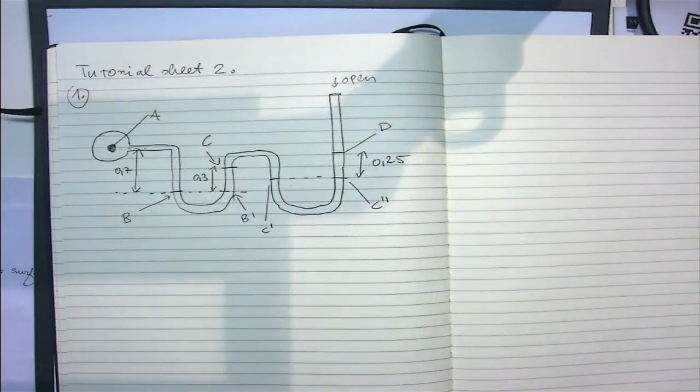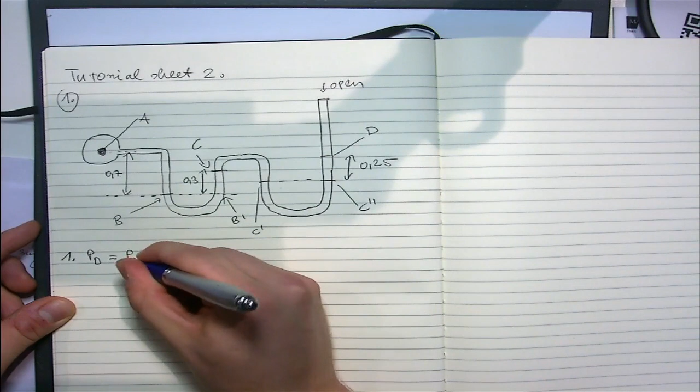And what we're going to do is start from point D and work our way back to point A. These questions look quite intimidating at first, but once you start to break it down, it will become a lot easier. The reason why we're starting at point D is because we know that this system is open. So at point D, the pressure is going to be atmospheric because this is an open tube. So the number one thing is pressure at point D equals the pressure of the atmosphere, ATM.

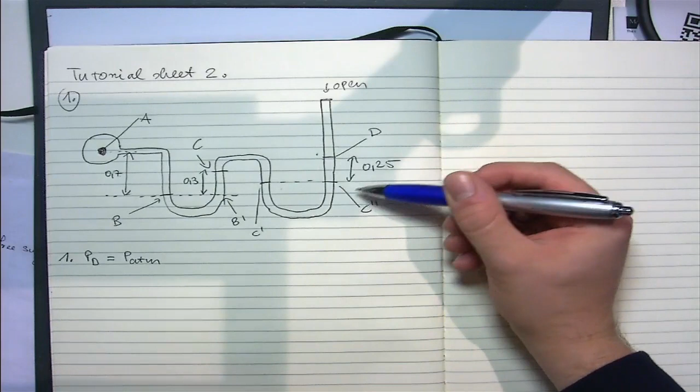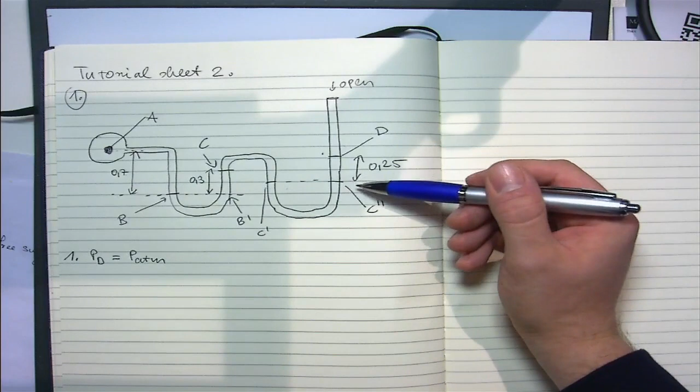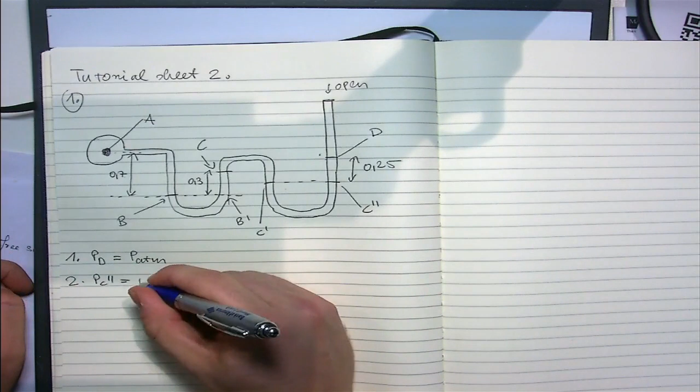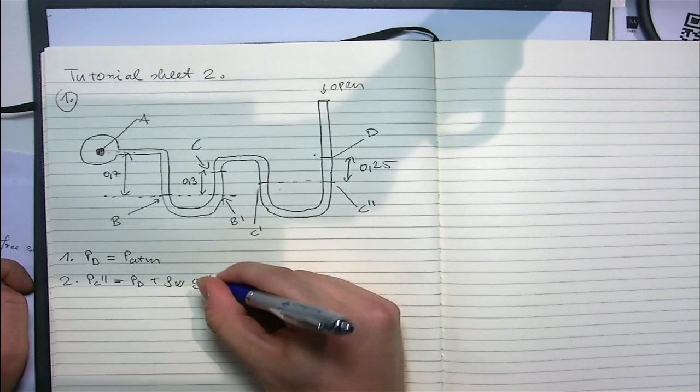So this is, so far, pretty clear. We're here right now. Then we move down to C2 dash, and what we see here is that there is water here, and we know that the equation for static pressure is rho times g times h. Then we know that PC2 dash equals PD plus rho water times g times 0.25, because that's the height of the water there.

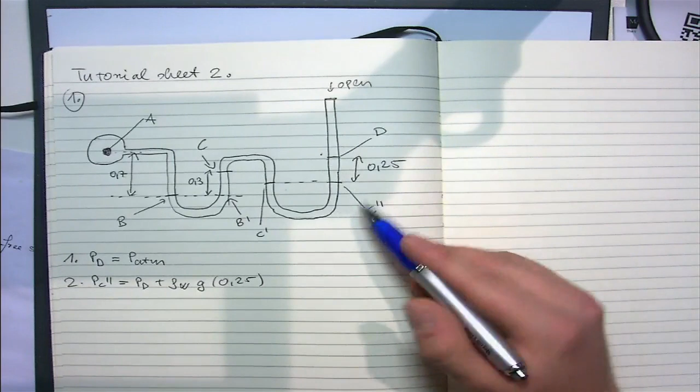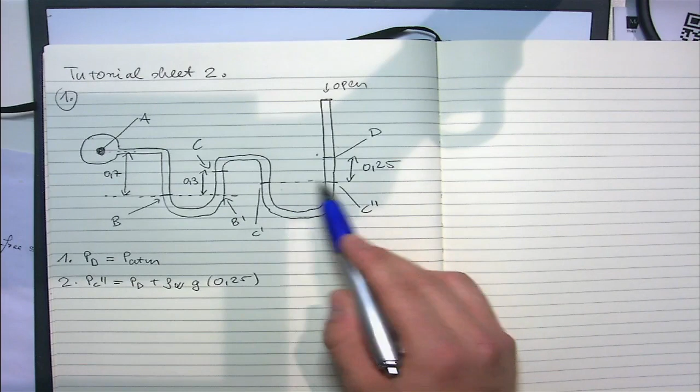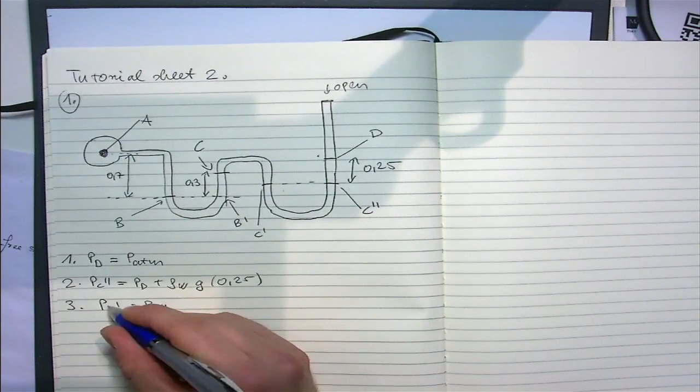So we know the pressure here. Because these are at the same level and they are connected, they will have the same pressure. So PC dash will be equal to PC double dash, because they're connected and they're at the same level. This is fairly intuitive.

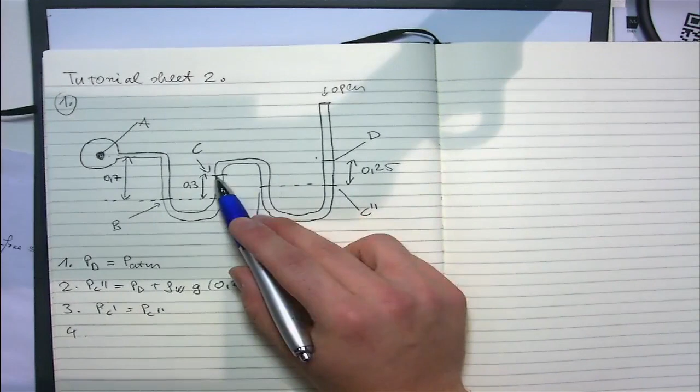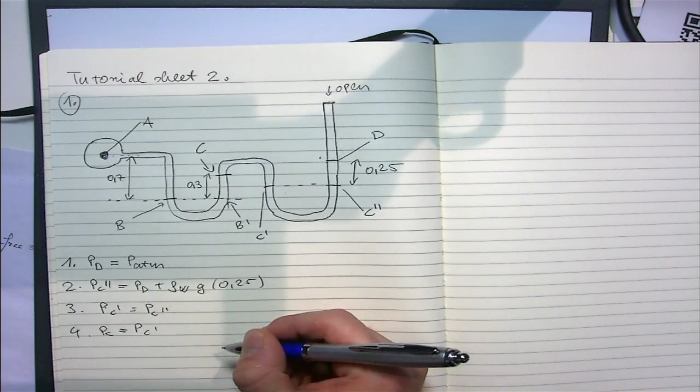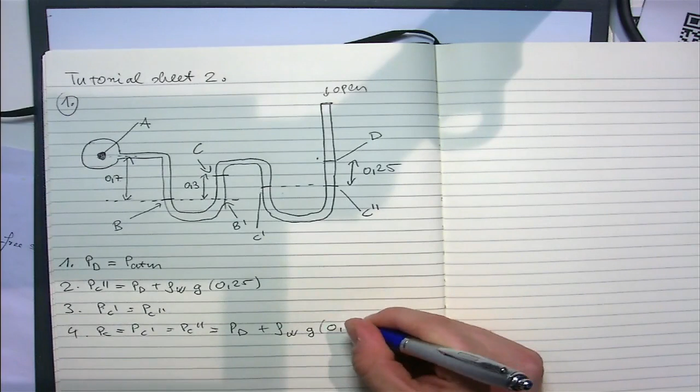And then we move on to C. If you look at the actual drawing, you see that the fluid filling the C section is actually air, and air has a relatively insignificant density compared to mercury and water. So in this case, we are just going to ignore this difference. So PC equals PC dash, which equals PC double dash, which equals PD plus rho water g 0.25. So we've already made it this far.

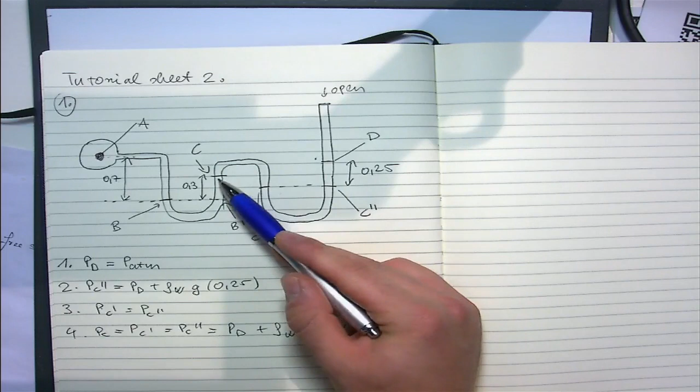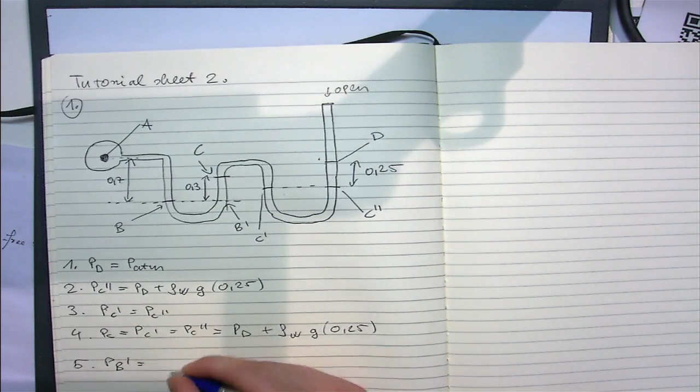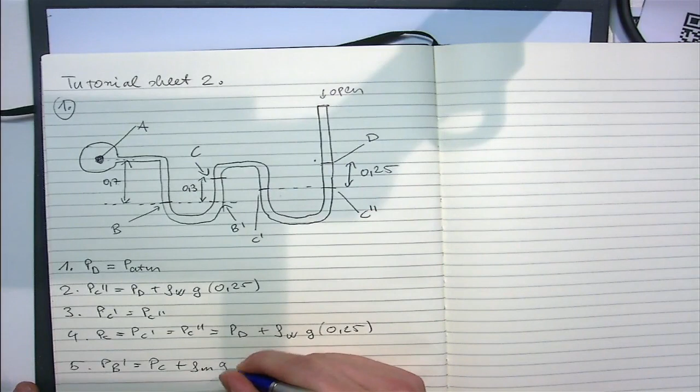Now the difference between C and B dash is 30 centimeters of mercury. So PB dash will equal PC plus this gauge pressure of 30 centimeters of mercury, which is going to be rho mercury times g times 0.3. Is this clear so far? Yeah? And then we move to PB, and since these are connected and at the same level, PB equals PB dash.

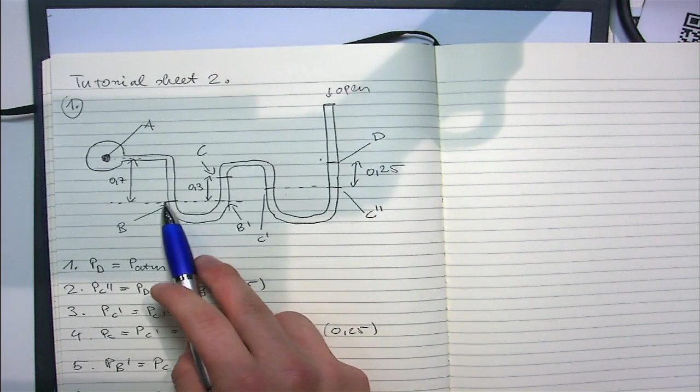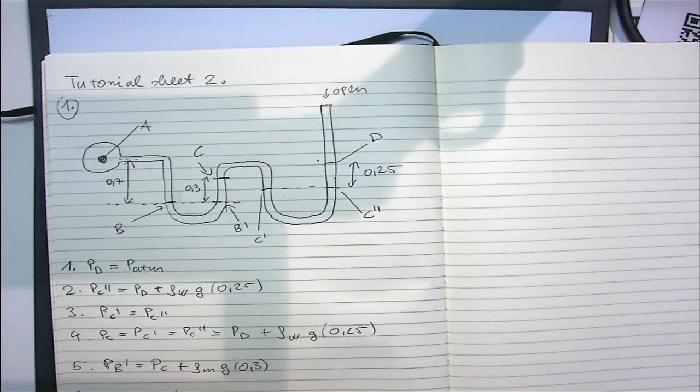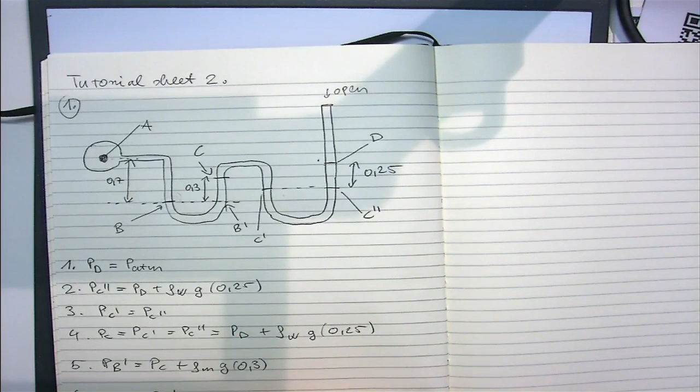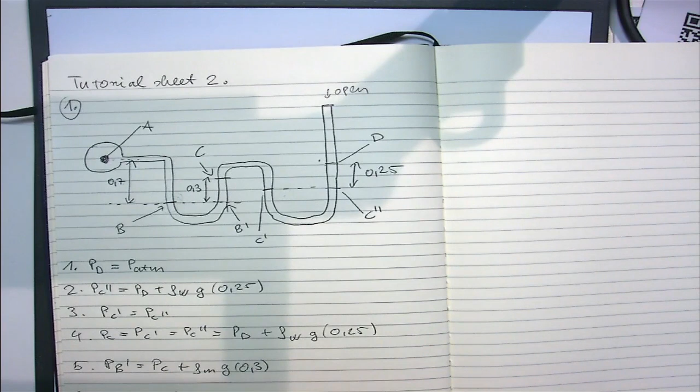Now we can find an expression for the pressure at A. We know that the pressure difference between point B and point A is 0.7 meters, or 70 centimeters of water. Then we can write an expression for PA. Let's write it a different way: PB equals PA plus 70 centimeters of water, PA plus rho water g 0.7. And because we know what PB is, we can figure out what PA is.

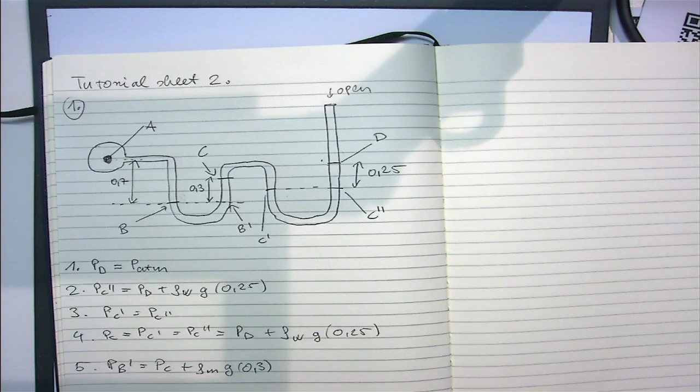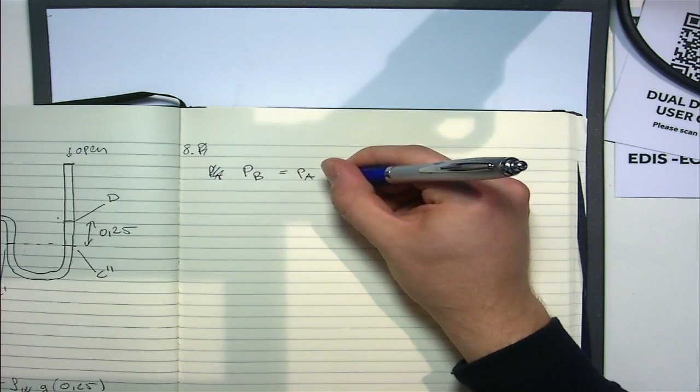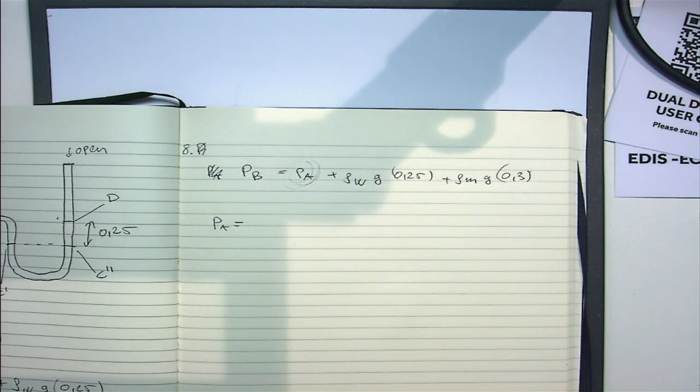So we're just going to put PB here. PB equals PA plus rho water g 0.25 plus rho mercury g 0.3. And then we shuffle PA out from the equation, and we get PA equals P plus... oh, sorry, I think I got stuck. PB equals PA plus that.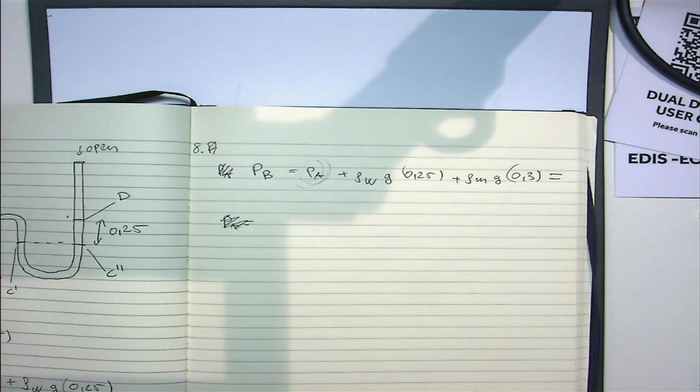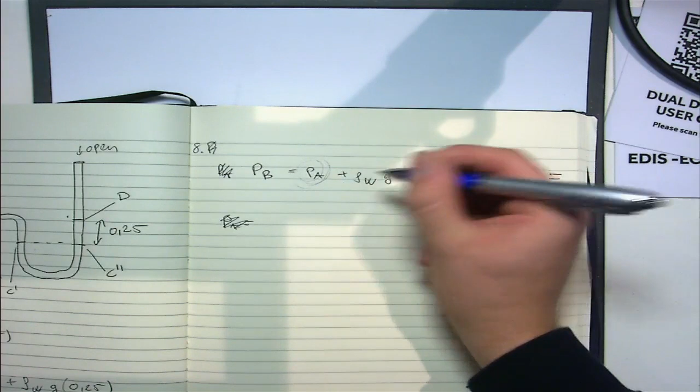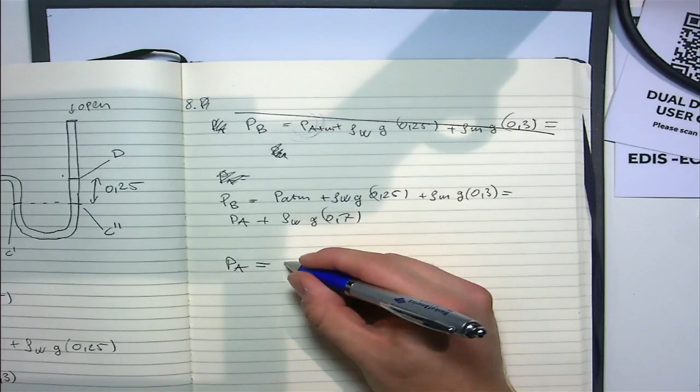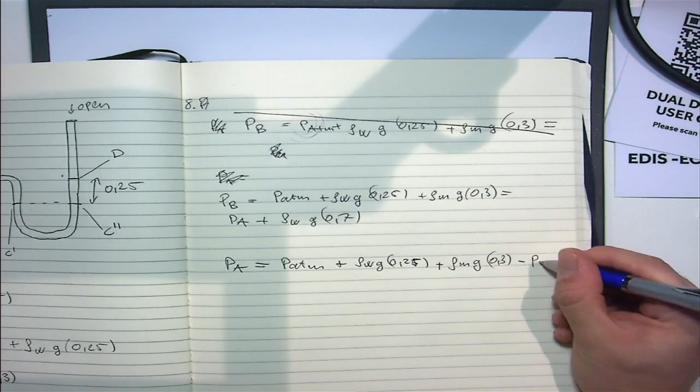Wait, what's the difference between this PA and that PA? That is atmospheric pressure; this is the PA. Oh yeah. So PB equals PATM plus rho water g 0.25 plus rho mercury g 0.3, which equals PA plus rho water g 0.7. So then P at point A is PATM plus rho water g 0.25 plus rho mercury g 0.3 minus rho water g 0.7.

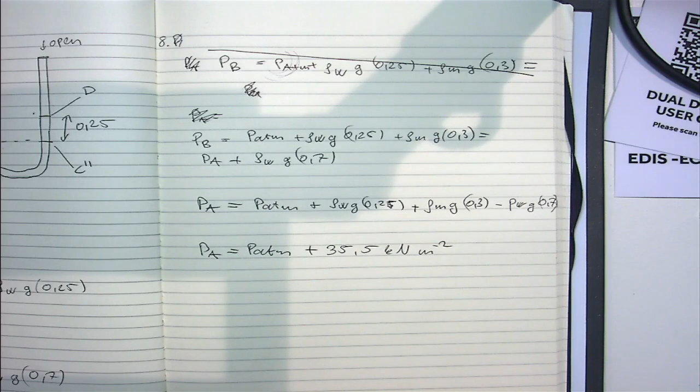And then you know that atmospheric pressure is 1 bar. I'll just write it out. Do I need to plug it in? If you plug in all the variables, then you will get that PA becomes PATM plus 35.5 kilonewtons per meter squared.

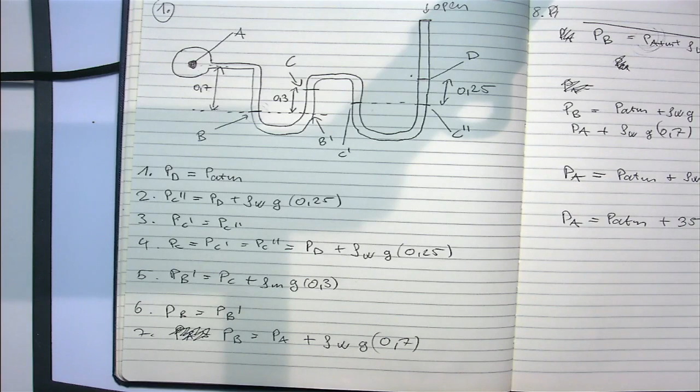Okay, did everybody have time to write this down? I'm just going to assume yes. And then for question 2, should we give them 5 minutes? Okay.

Yeah, yeah. Don't worry about it. Honestly, I don't.

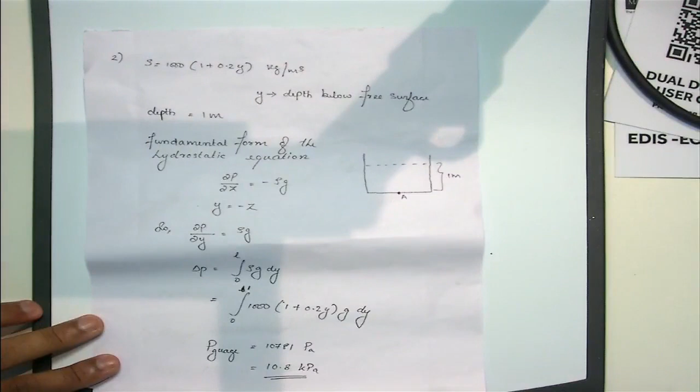I feel like once they start talking, we can start doing this. Okay. Okay. Yeah, just, where is the question? I want to see the question. Oh, the question. Yeah. There you go. No, not this one, right? No, the real one. Oh, the fifth one. No, second one. Second one. This one. Okay.

So we'll go to the second question. Please listen. In the second question, density is not a constant. It's given as a function of y, and y starts from below the free surface. It's not from the bottom. It's below the free surface. I mean, y starts from here.

Okay. So density is a function of y, and we have been asked to find out gauge pressure at the bottom of the tank. Based on the fundamental form of the hydrostatic equation, we know that dP/dz is minus rho g. Now you have been asked to find P at the bottom, so you need to integrate from the top to the bottom, from y equal to 0 to y equal to 1 meter. So if you integrate it, you will get the answer.

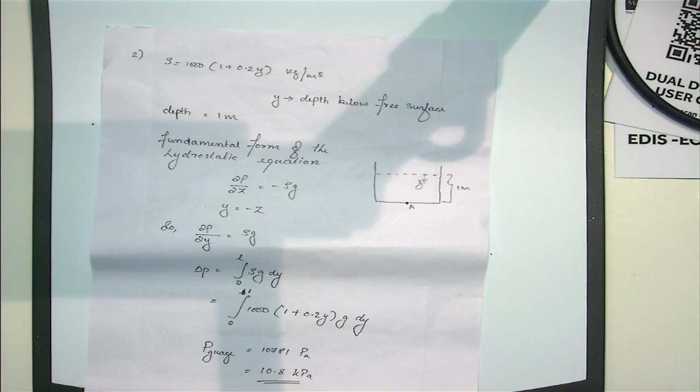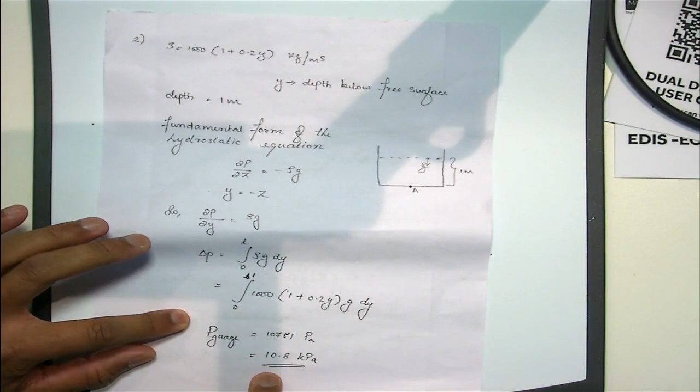It's a straightforward question. dP/dy is equal to rho g. Delta P is equal to integral 0 to L rho g dy. Then you integrate from 0 to 1, you put the values, and you will be getting the answer 10.8 kilopascal. That's it. Is that clear, or do you have any questions?

I mean, in this second question, the way that you would approach this is, first you obviously draw the tank, and then you realize where is y equals 0 and where y equals L. And yeah, just integrate the equation. Yeah, just give them some time.

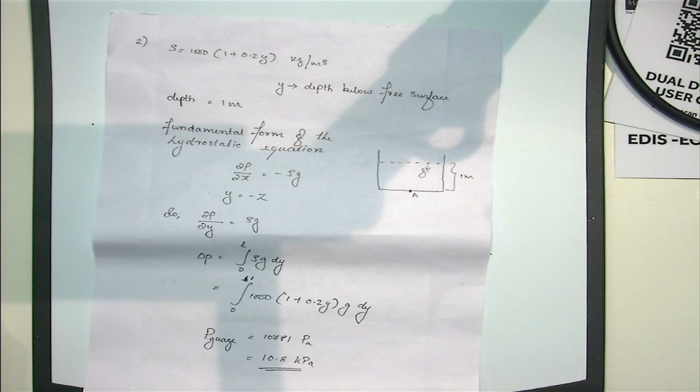Okay, we're gonna move into question 3, if that's okay, or are you still writing it down? Okay. Question 3. Let me see. Do you want me to do question 3? I think it would be good for them to go through it really slowly. Okay. So I'll just start writing up. Because I'm a really visual learner. And if we run out of time, I don't think it's that big of an issue. I'd rather be slow and make it 100%.

I'm just looking at my awful illustration. So the first thing you should do, again, in this problem is to create a drawing. Mine is a bit, well, good for illustration. So essentially we have two different states.

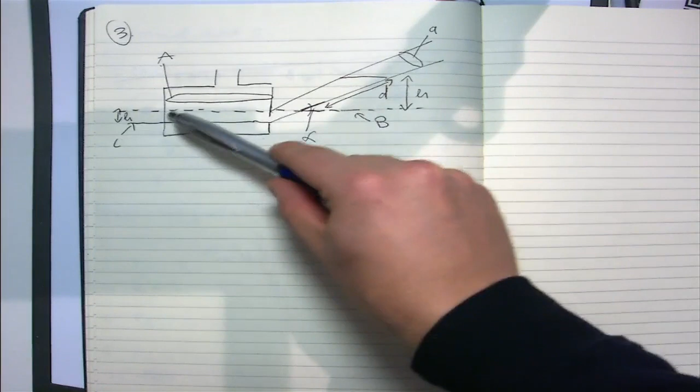The first state is when the instrument is open to the air, and when it's open to the air, it's at level B. And the second state is when we close the system and apply the pressure. Once we apply the pressure, this level of liquid will go up here, and the level of liquid in the tank will go down here.

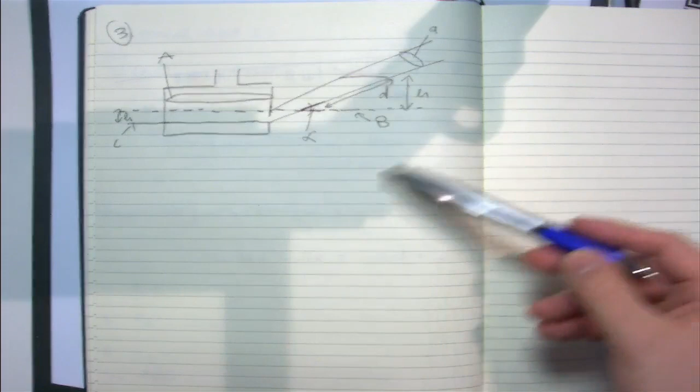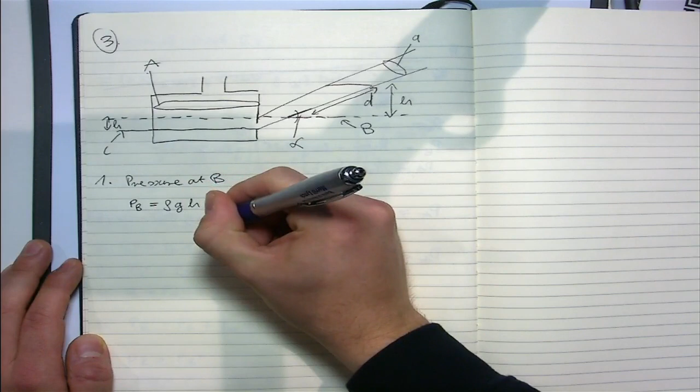So the first thing we need to figure out is what is the pressure when the system is open to air. So the first point is pressure at B. Pressure at B is going to be PB equals rho gH.

This H is between the new level and the old level, and the pressure difference is going to be rho gH. Because this is inclined, we can find the expression for H as D times sine alpha, because here you see a triangle.

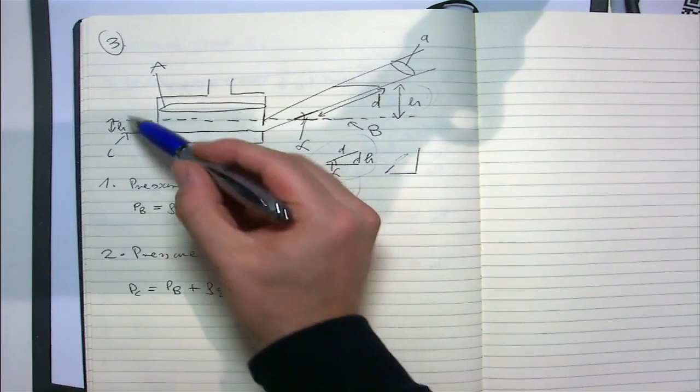This being alpha, this is H, and this is D. So you use this to get this. And then the second thing that you have to think about is pressure at point C, which is going to be here. So PC equals pressure at point B plus rho G delta H. And delta H this time is the displacement here once we apply the pressure. And this you can express as rho G D sin alpha plus rho G delta H.

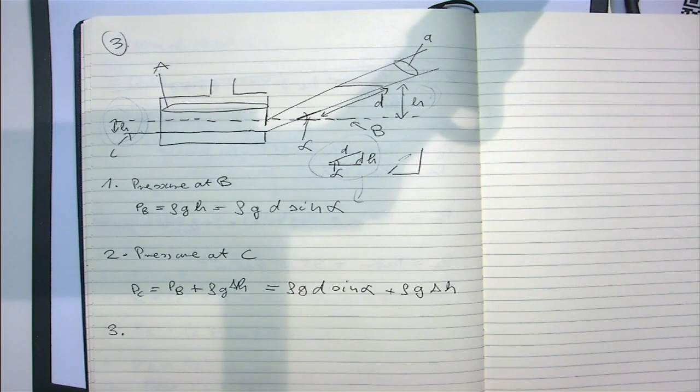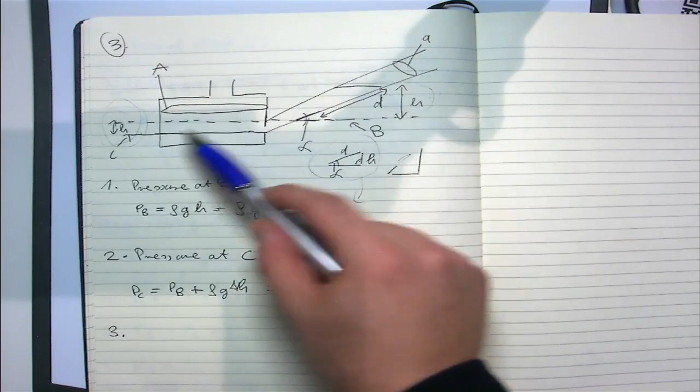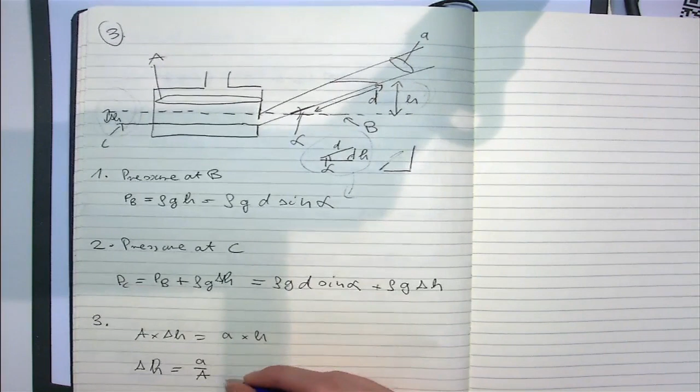So here, the next step is realizing that in this question we treat oil as an incompressible fluid. So the displacement here will be equal to the displacement here. I mean, the same volume will be displaced. So the way you calculate this is that you have the two different surface areas and the two different displacements. So you can write an expression for that, which will be A, the big surface, times delta H. So the displacement here will equal a times D, the displacement here, because it's an incompressible fluid. That will give you delta H equals small a over capital A times D.

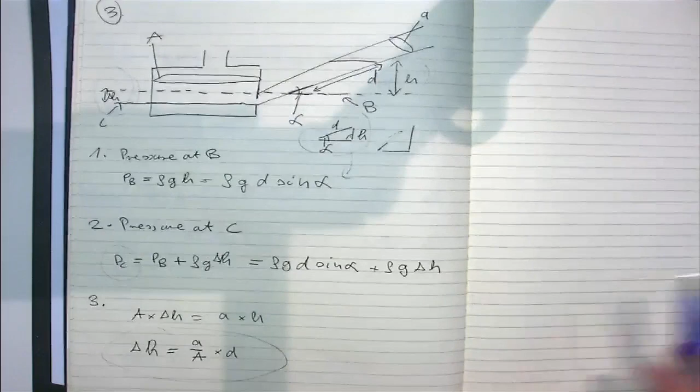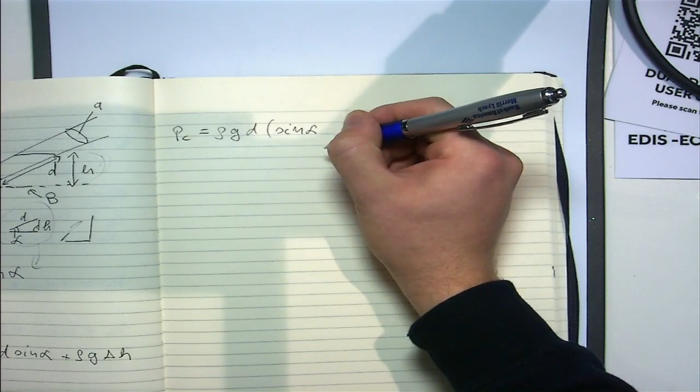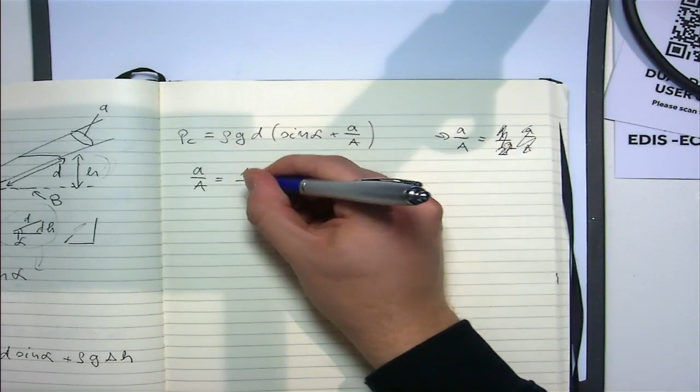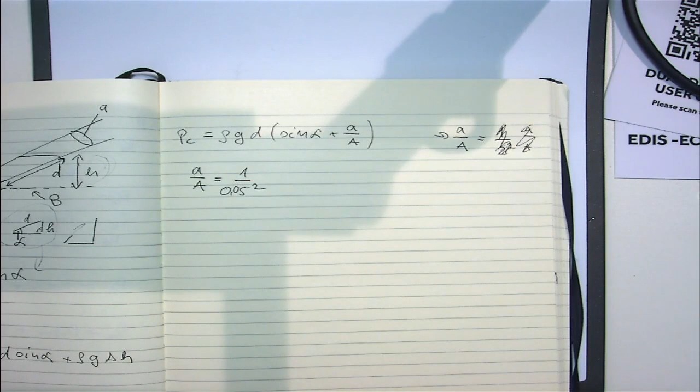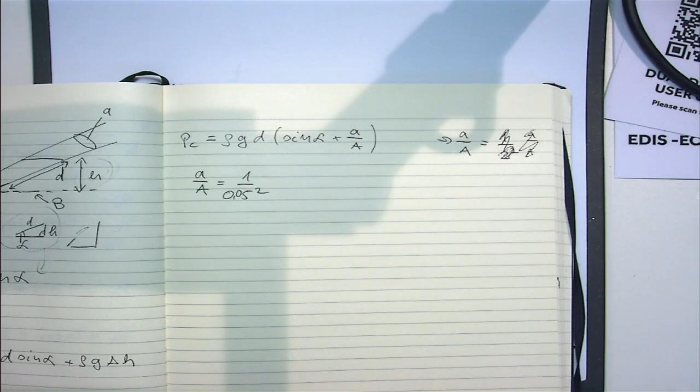And from here, you will just have to rearrange this equation to sin alpha, and then plug the numbers in, and then you will get that alpha is 2.85 degrees. Do we need to have pi over 4? I mean, this is no. I mean, so yeah. Yes.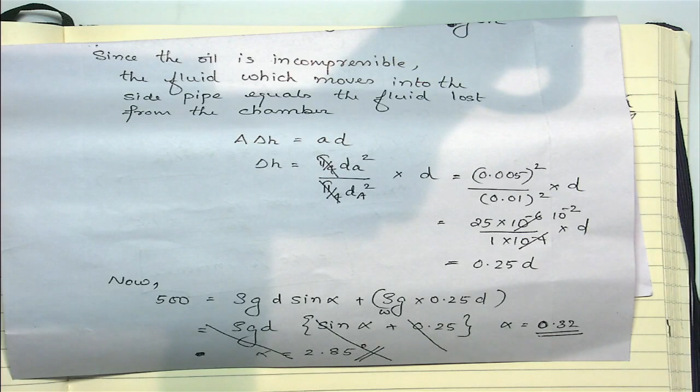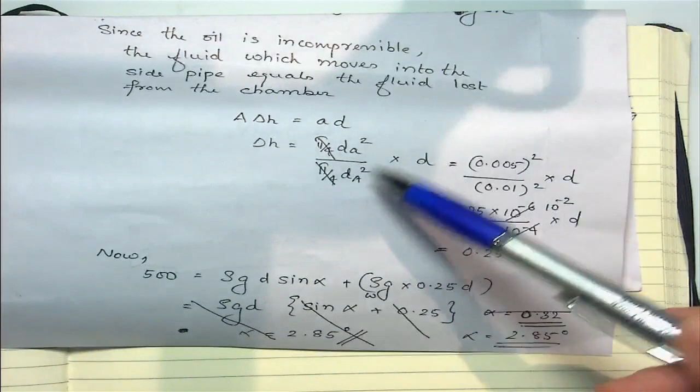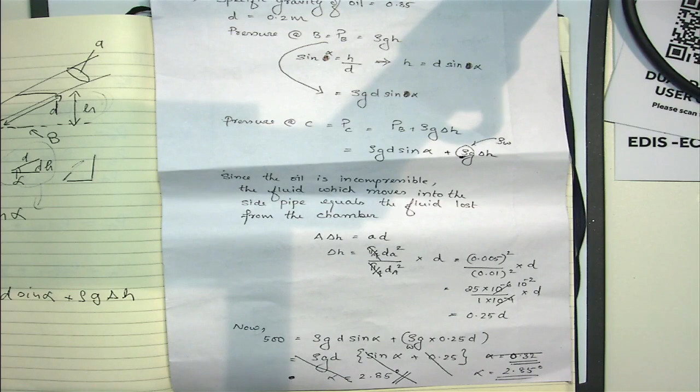So do you want to give them some explanation for this? I think they can do it, right? No, I mean just explain the idea. It's a substitution. Yeah, so here what happens is he's substituting the surface and expresses it with diameters. Oh. Right. Yeah. I think there's this stuff in here. Okay, I think we can move on.

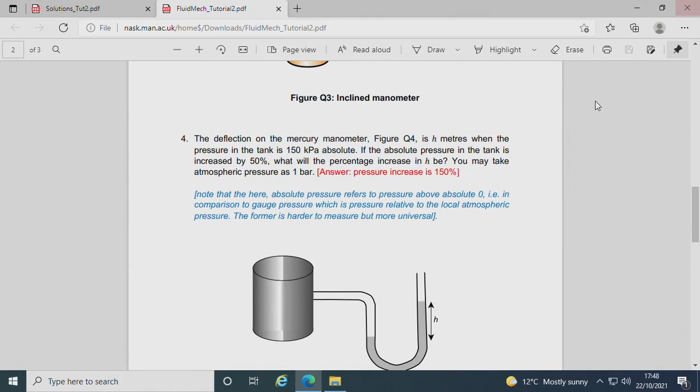And then question 4 will give you again. Yeah. I like your handwriting. I like your handwriting. Yeah.

So let's move on to question 4.